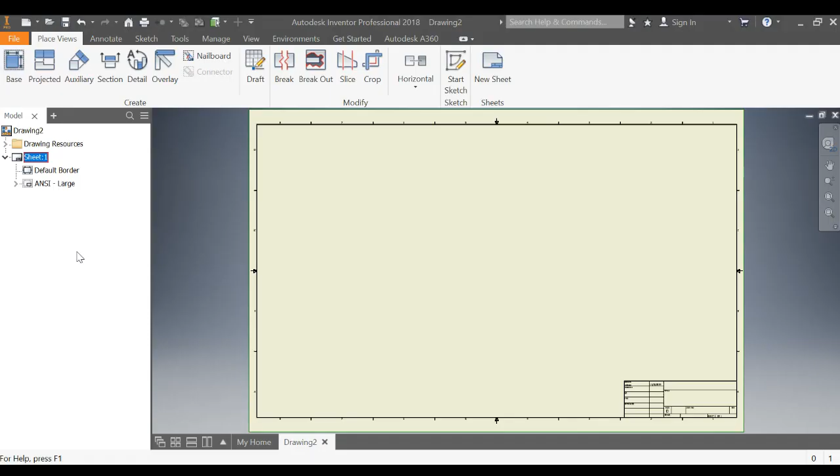First thing you'll want to do is come here to where it says size. Change the size to size A. This is your standard 8.5 by 11 piece of paper, that's what we're printing on my printer.

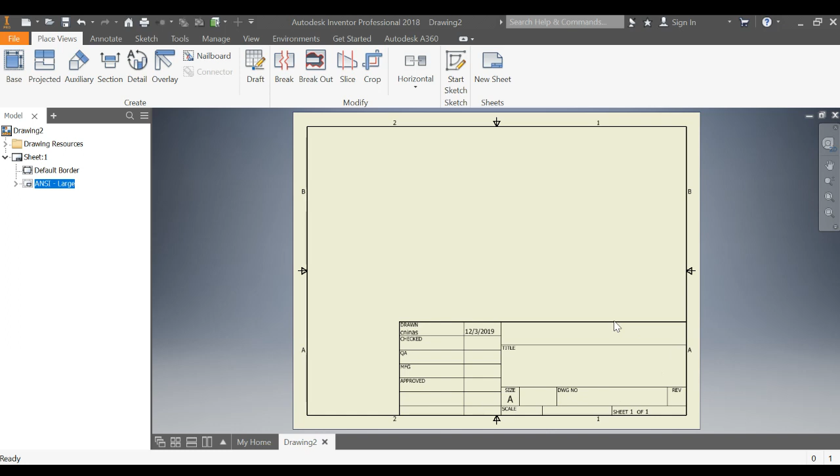For now I also would like you to delete this ANSI-large. This is the title block down here, and what this does is just give information about the file and the designer, but we're not going to worry about it yet. So right click and hit delete.

So now that we have a blank canvas, a blank surface to work on, we need to lay our parts down. The first thing we're going to do is place views, and we're going to place our base view. It's the first view in a drawing.

Click base. Now, if you have just finished working on your cam, it will probably automatically select that file. If you have not, you're going to have to choose your file to make views of.

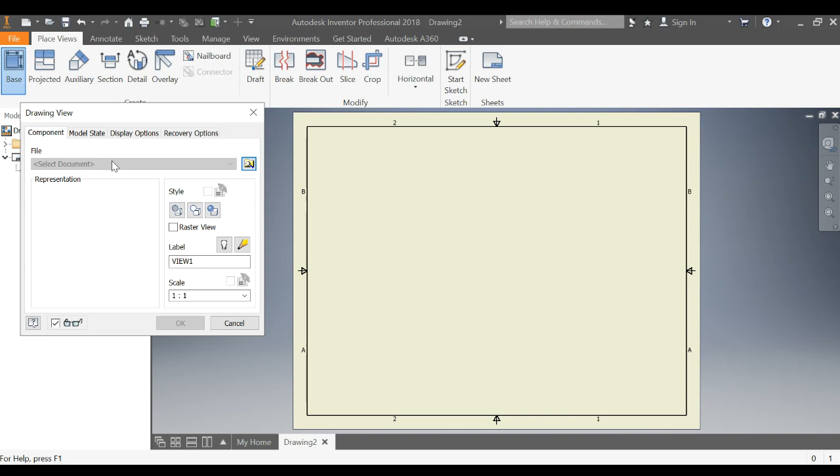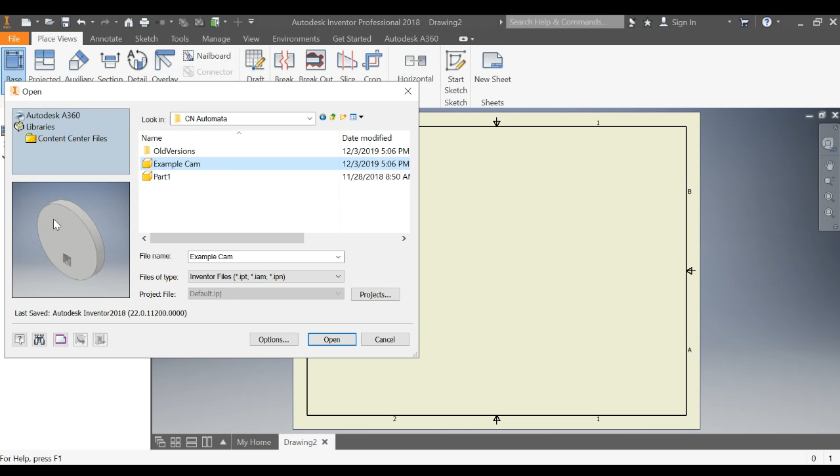So over here we're going to open an existing file. You want to locate your file, okay, and wherever it is, locate your file. Mine is example cam, you can see at least a preview right here, and click open.

All right, next thing that we want to do, make sure that your scale is listed as 1:1. That means it's placing your cam on an 8.5 by 11 sheet of paper at full size. Make sure your view cube is rotated so that you have the best front view selected right here.

With drawing files, a little bit of setup goes a long way. So here's how we're going to do this. I want you to take your front view,

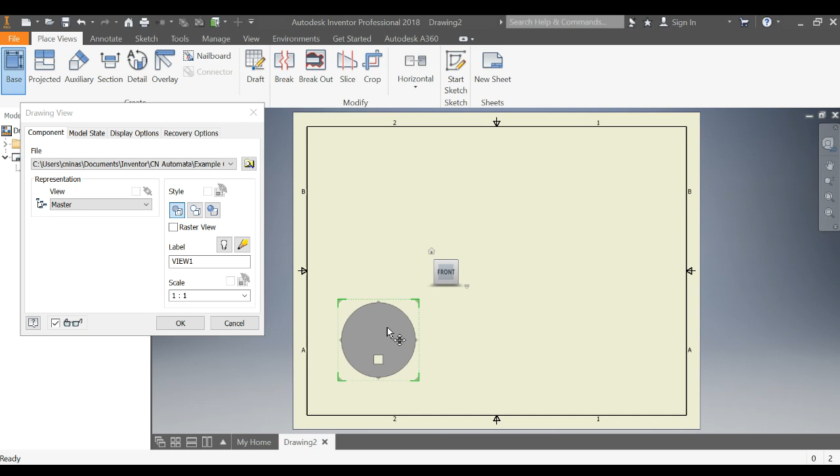click hold, and just drag it down to the bottom left where a front view normally goes, and release. You're only clicking and dragging, you're not clicking to place. The placement is automatic. Now you move the mouse up for the top view, and you can see this dotted outline. Click once.

Move it to the right, here's our isometric view, click once. Move it down for our side view and click once. And once you have done all those, and these are all in place, click OK.

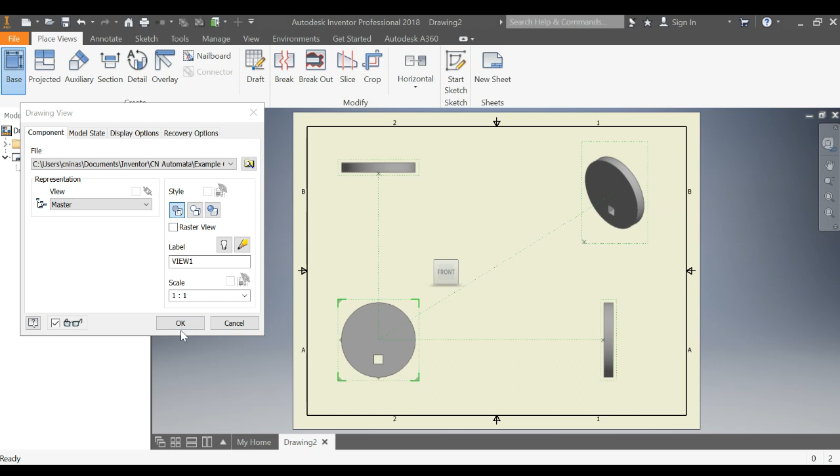Next thing that you're going to want to do, come over here to the isometric view. You can see when you hover over a certain part this red box, double click on that, and we're going to change the style to shaded. That is right here, we're going to hit OK.

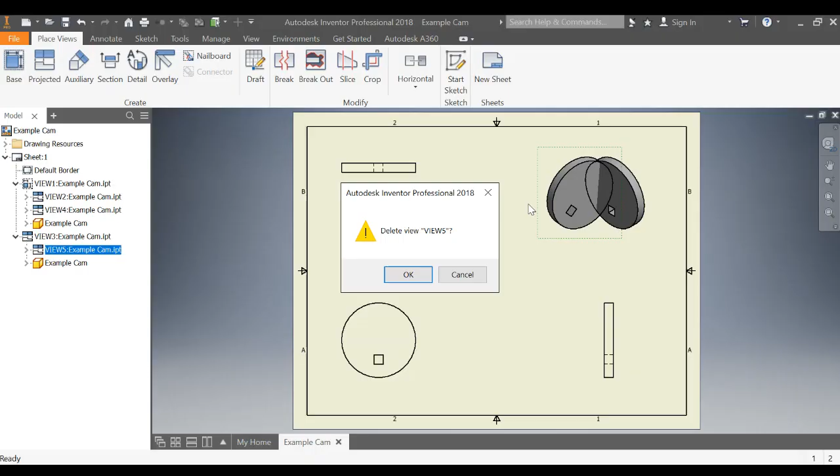I accidentally put this, so I'm going to delete view 5. But once again, with that, you want it shaded.

All right, and so now we have our life-size drawings, but we need to add dimensions. So here's how I'm going to do this. I'm going to click the Annotate tab on the ribbon bar, and I'm looking over here in the Dimension section. Here's the important things that I'm going to do, and I'm going to show you the easiest ways to do this.

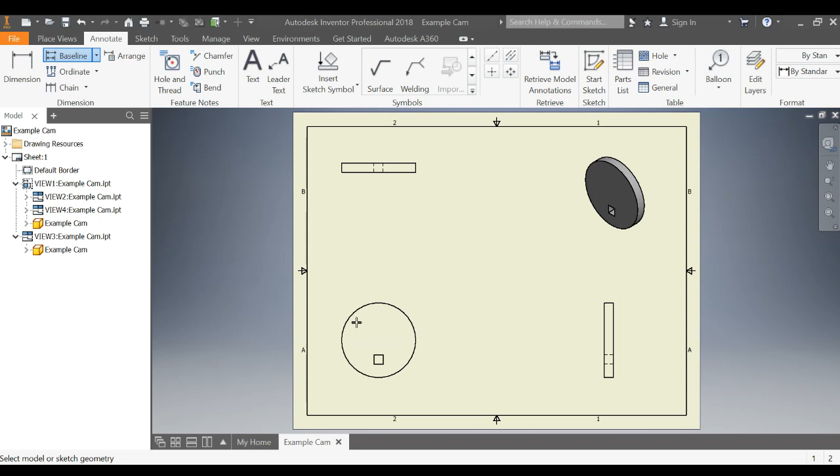First, we want our baseline dimension. So I click baseline, and I'm going to click drag to select this entire object. Right click, continue, drag your dimensions out to the correct location. Remember, it should be between views. Click once to place, then right click and create.

That's now given me dimensions for this hole. Next, I need the diameter of the circle. So I'm going to click dimension, and I'm going to dimension this. I can individually dimension things by clicking on the outside of them. Click to place, click OK.

I can dimension the thickness right here. Same kind of way that we were dimensioning before. I want the distance between this and this. I drag out, you click, once again you click once to place and hit OK. Now we have our dimensions.

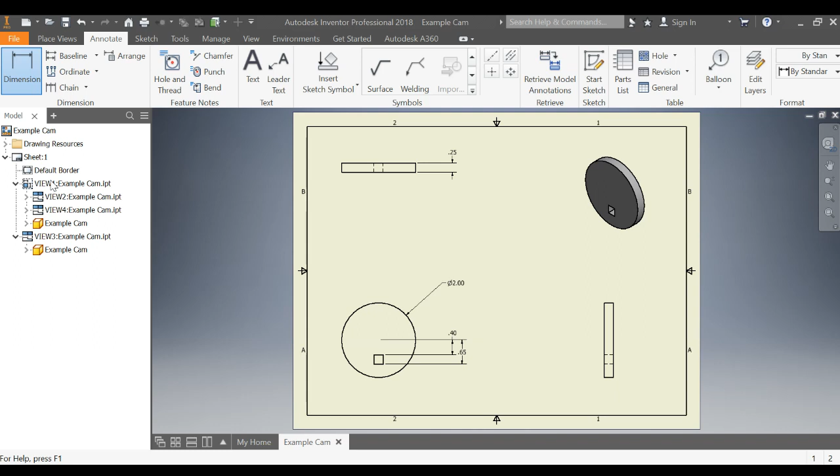So you want to File, Save As, make sure it's saving in the correct spot. Name your file, it should be an IDW, and click Save. That is how you create a dimensioned drawing file for the CAM.